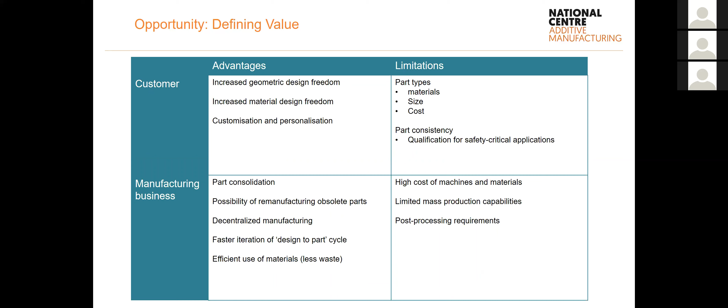Post-processing for metals, for example, often includes heat treatment, more machining, and potentially hot isostatic pressing and things like that to get highly dense parts as well. And you may also need to consider your infrastructure requirements. So you may need some environmental controls, extraction controls, and things like that that you don't necessarily have in your facility at the moment. So a little bit more depth about some of the advantages and opportunities that we've talked about.

You could potentially go a step further than that as well and start looking at more organic flows through the manifold, depending on the design constraints that you've got. So you can really add greater value to the product, and it's more likely that you're going to get that out of it to start with than to reduce cost. So generally your business case will be around added value, and you get more added value if you're doing product redesign. So it would be very difficult to justify a business case if it's based on making legacy parts with the same design to reduce cost. That's generally not going to give you the payback that you need, but you need to think outside the box a little bit in terms of the next generation of products. Okay.

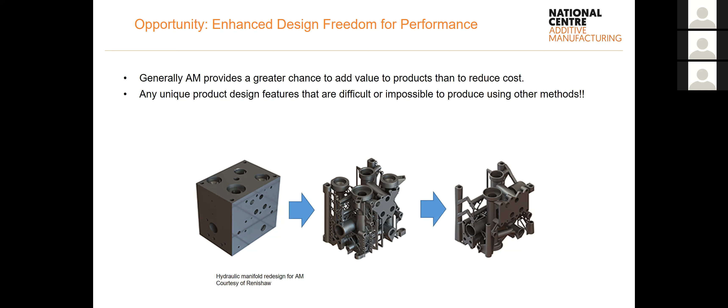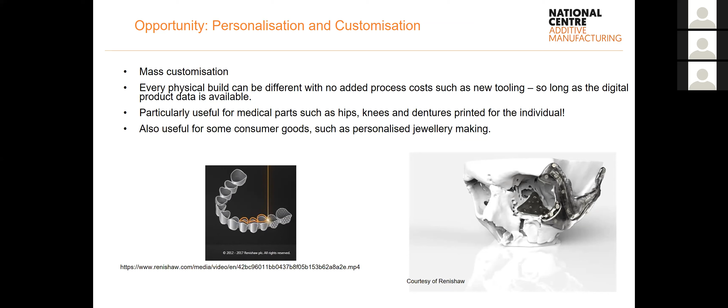So you can imagine some of the uses of this in terms of spares, tooling, and localized production in remote locations that don't necessarily have the engineering expertise that you might want to transfer. And you can do all of that instantly as well, because as soon as you've got the digital design, you can effectively send that and make it locally. So it's potentially a strategic example that might be worth thinking about in your business case and quantifying as well.

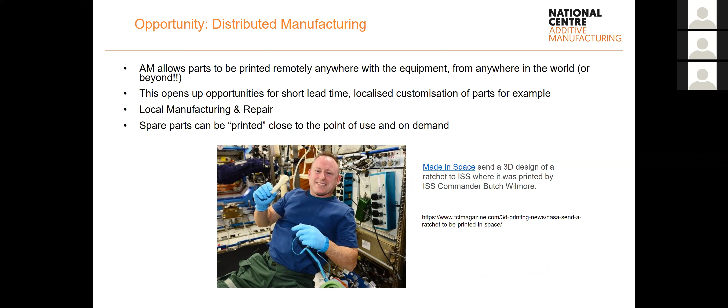So tooling elimination, rapid changeover might be a really good opportunity for you to think about reducing cost and lead time in your manufacturing cycle. So when you're doing your business case, it's always worth looking at a methodology such as value stream mapping, conventional methods for making this part, because you may actually find that it's not just the obvious costs that are in there, but the costs of inventory and the added cost and risks of extended lead times of batches of inventory between different processes. It's often possible to eliminate that by using additive manufacturing, because you don't have so many processes, and you certainly don't have any changeovers. There's no risk of tooling failure, and new tooling is often a bottleneck.

So if you're maybe casting or forming parts, then tooling can actually take quite a long time to come. And if you're thinking about things like prototyping or rapidly changing the design, then it can be a bottleneck, and it can mean that the competitors can get to the market before you. We've seen examples of businesses actually using additive just to demonstrate that they can produce a design and get it to the customer within days or hours, rather than traditionally perhaps weeks or months where they've been waiting for tooling. So real competitive advantage that you really need to think about quantifying in your business case as well.

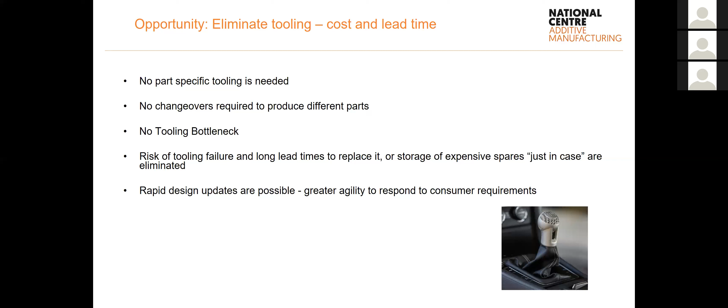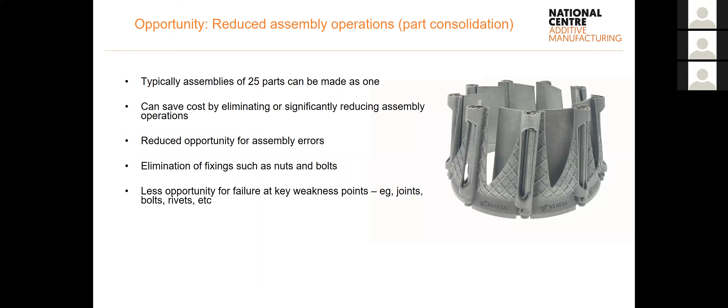This is an interesting one. So reduced assembly operations or part consolidation. So we found that typically you can reasonably easily consolidate up to about 25 parts into one print. The example that we've got on the right hand side here is an engine air brake that was produced by the DRAMA project here at the MTC. It's actually a moving part, so the flaps that you can see in the device are actually motorized now at the MTC using the gears underneath, and that's all printed as one.

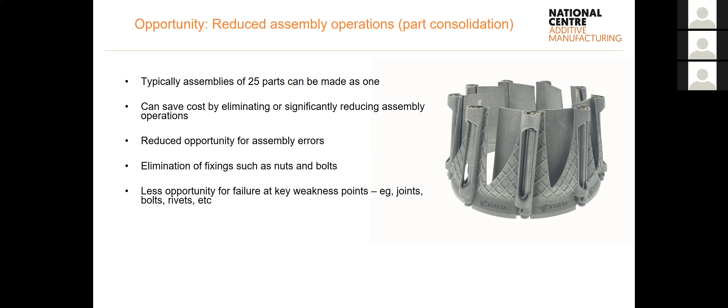So it's perhaps a bit of an extreme example, but if you think that you can eliminate the need for a lot of your assembly operations, you can eliminate the need for a lot of your fixtures and fittings, and therefore you're eliminating a lot of the potential quality failures, maybe supply chain shortages that you get on those parts, and you're generally simplifying the manufacturing process by consolidating everything into one assembly and effectively into one process. So there's cost reduction to be had in that, and of course reduced lead time.

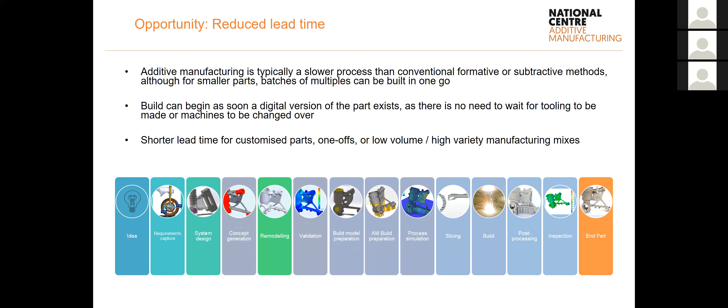So although you can't typically produce parts at volume using additive manufacturing as fast as you would perhaps injection molding, even machining, but certainly casting and forging and processes like that, actually the lead time to changeover is a lot smaller. So it can, depending on the type of product that you're producing, massively reduce your lead time. And actually we're finding increasingly now that you can build more and more products on a single bed, on a single print. So although the process itself may take a number of hours, potentially you can build quite a significant batch of parts if they're not too big.

And of course the lead time to actually making that part from design is as little as none. So we're sending the digital data over to the machine, and there's no need to wait for tooling, no need to wait for machines to be changed over. So it's the ultimate sort of SMED activity, or rapid changeover activity, if you like.

In your business case, this may seem a little bit intangible to some, but try and quantify that readiness for future market opportunity. So an example here, a parallel would be the composites industry maybe a decade or 15 years ago, looking at aerospace. So over the last decade, a lot of the aerospace primes and tier one suppliers have actually consolidated the composites market and the composites manufacturing businesses by buying them out effectively. What these businesses have done is seen the future opportunity in that technology, and now it's embedded into aerospace. And additive is perhaps at the same sort of stage.

So a lot of businesses out there are adopting additive now, and part of their business case is actually to demonstrate capability, to learn lessons now, to build the engineering expertise, to prove that they're ready when the end customers do come along and say, actually, we are now ready. Our next generation of engines or our next generation of Formula One cars or whatever it may be have now got a demand for more additive parts. Are you ready to go?

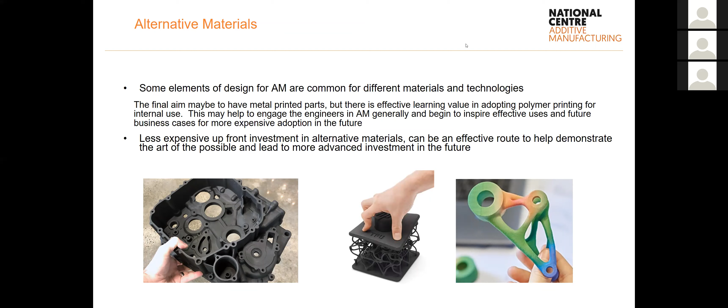Another point to make in your business case. So I talked about how you're not necessarily going to go from nothing to making safety critical, high integrity parts overnight. And it's quite common across the industry and across all of the sectors really to start by making some of the lower critical parts, again, to really get that knowledge, experience, and demonstration of capability into your business before you can then pass that gateway into demonstrating that you've got capability in the really advanced stuff.

So for example, in aerospace, you'll find that new Airbus and Boeing aircraft have tens of thousands of additive manufactured parts. The vast majority of them are internal fixtures and fittings. And that's not surprising. It's a safer way to get lightweighting into the aircraft, but increasingly you start to see more and more safety critical parts using additive as well.

So again, low criticality parts as a gateway in, and you may be able to do it by looking at alternative sectors. So if you're in a high integrity sector that's got a lot of qualification and developing safety standards, such as medical or aerospace, it may be that you start your business case off by entering another sector that's more tolerant to risk and change, such as motorsport here as an example. So it's not untypical for aerospace companies at the moment to switch sectors, at least in the short term, to less risk averse sectors, to be able to learn and try out the new technology.

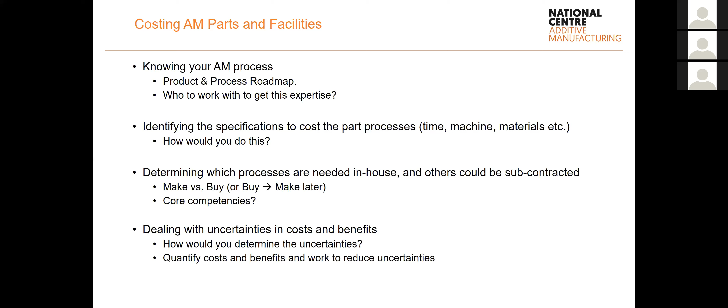Obviously quite a lot of analysis goes into this that's difficult to do until you've got the designs of the part, and as you go forward you'll probably determine that you're going to start with a limited number of parts, and in all honesty you're going to make a loss with your new additive investment. That's okay, because hopefully your business case then starts to fill up that capacity with real load as you go forward, and you need to try and model those production costs for what you're going to be making.

Understanding the facility cost over the period, the whole life cycle period. So for example, especially with things like additive machines, there's quite a big second-hand market for them. So really understanding, what's the total cost, but what are you going to get back at the end? And what's that total cost over, let's say 5 to 10 years.